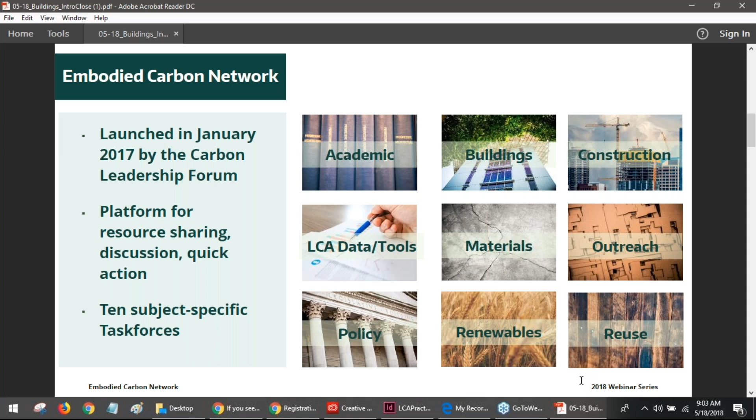The network has 10 subject-specific task forces open to members to join. They can join as one or as many as they would like, and these are spaces for more focused engagement around a specific topic. So the Embodied Carbon Network was convened by the Carbon Leadership Forum. The Carbon Leadership Forum supports and manages the network, and it's an academic collaborative based out of the University of Washington that carries out research, education, and outreach focused on embodied carbon tracking and reduction.

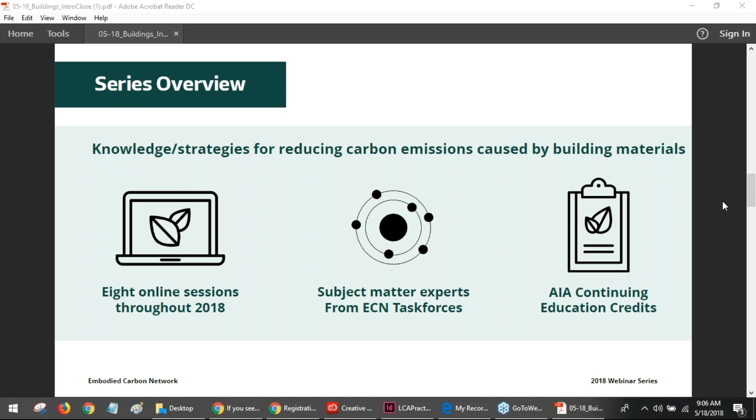So I'm just going to give a brief introduction of what is to come over the next 55 minutes roughly. So we are going to be joined by Kate Simonen, Megan Stringer, Caitlin Gillis, and Graham Twyford Millis. Sorry if I mispronounced any of those names, which I'm sure I did. I'll just give a brief introduction of what each of them will talk about, and then we'll go into the presentations.

So we'll start with Kate kicking us off with an update on the initiatives of the Carbon Leadership Forum, who's been pushing the adoption of LCA in practice, and she'll reflect on some of the insights learned so far through her work, and particularly talk about some connections with the LEED green building system.

Then Megan will share some information on a new document published by the American Society of Civil Engineers. The document's called Whole Building Lifecycle Assessment, Reference Building Structure and Strategies. So it's all about the reference building in the LEED credit. Megan helped develop this document as part of her participation in the Structural Engineering Institute Sustainability Committee.

We'll then move it over to me, and I will give a brief presentation of a document by the Royal Institution of Chartered Surveyors. It's a new document that was released last year, and that's a group based in the UK. I know quite a few of our members and those calling in are based in North America, and they may not be familiar with this document from the UK, but it's a very high quality and useful document, so I wanted to make sure people were aware of that.

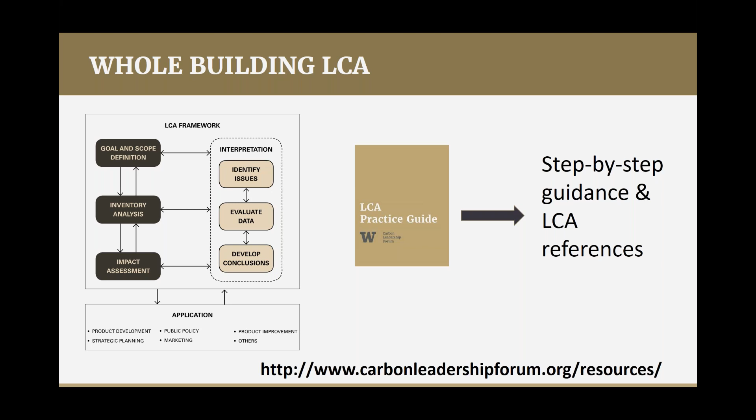Broadly, when conducting a whole building life cycle assessment, there are two numerical efforts. One is to estimate the inventory of materials, and I could say materials and energy in a building. So you're understanding the quantities of steel, glass, electricity consumed, natural gas consumed, and such.

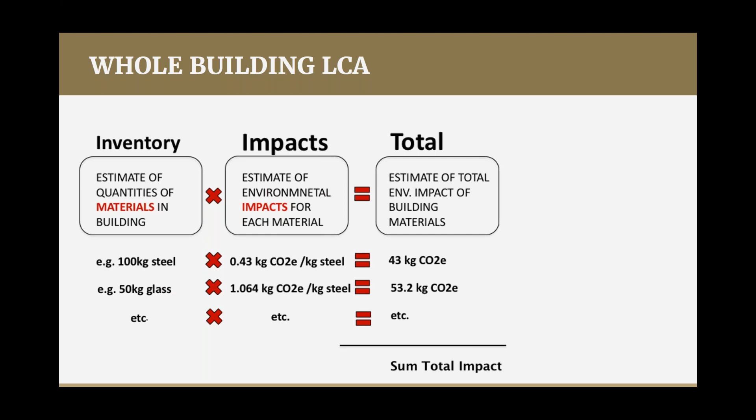So first you need to understand that inventory of materials, and then you need to multiply it by environmental impact, an estimate of the environmental impact for each of these different processes. And then you're summing them up to get the estimate of the total environmental impact of a building. In that process, there are whole building LCA tools that help do both of those steps. They help estimate the inventory of materials and include environmental impact estimates.

So there's one category of LCA data that can be obtained with building industry specific tools. There's also LCA data available if you understood the quantities of materials yourself. So if you had a bill of material quantities, you could multiply by impacts from a range of data sources, some free, some higher quality, some more transparent and easier to use.

So in current North American practice, most architects and engineers are either using whole building LCA tools, Athena or Tally, or they are accessing open source LCA data from either environmental product declarations, the Bath inventory of carbon and energy, which is based in the UK, and the Quartz database of materials, which has both environmental and health impacts. And so which tool to use depends upon whether or not you already have material quantity information and what interface you're looking for to estimate those material quantities in your design workflow.

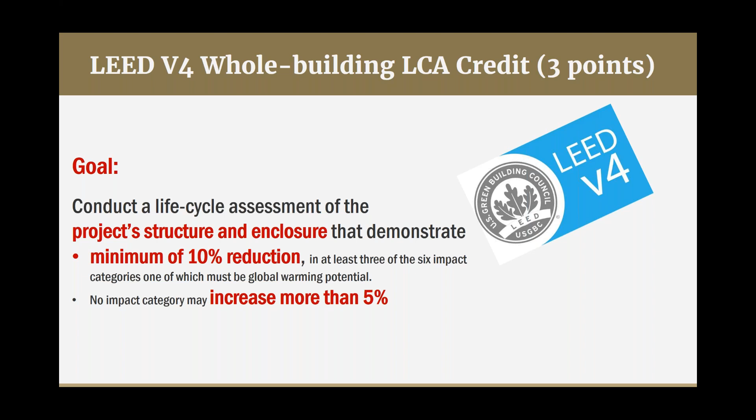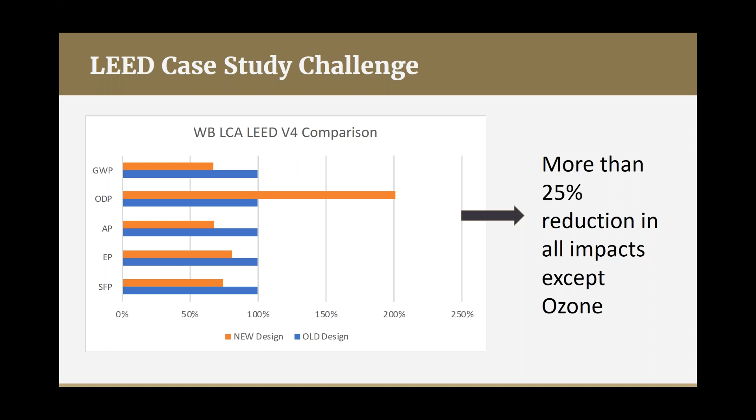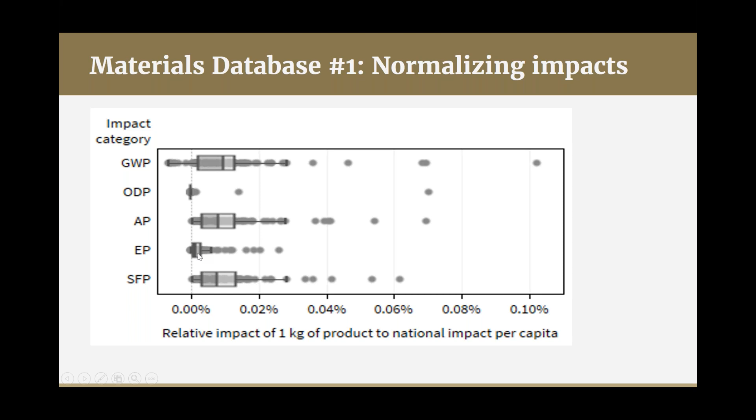Eutrophication potential is also not highly correlated with building material manufacturing because it's mostly related to fertilizers and nutrient flows. So one would expect that eutrophication may show up in some of the timber production in the Southeast where they use fertilizers and some other things, but it is less significant than the impacts that are related to fossil fuel consumption.

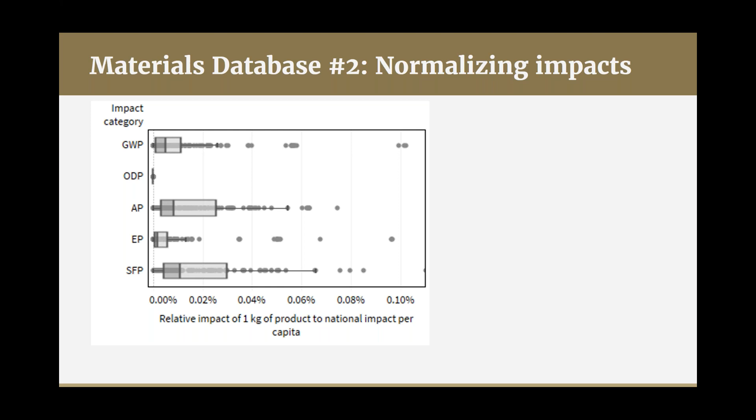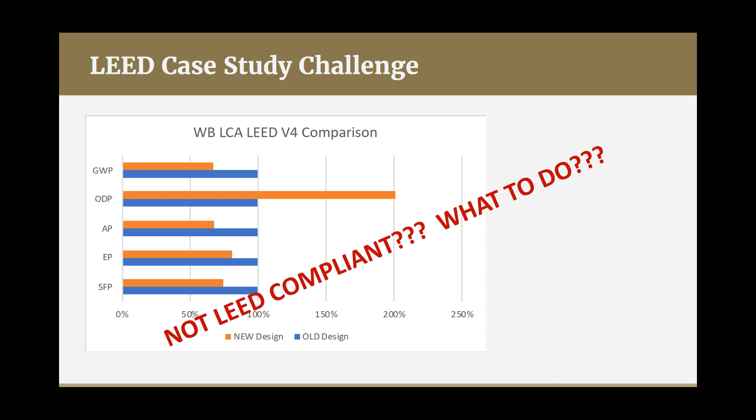So looking at this whole building life cycle assessment, it shows that it's not LEED compliant. What should you do? Should you not make this change, which has a fairly significant reduction in many impacts, because it has a high increase in another? We're putting together an argument that in the next iteration of LEED we should not include ozone depletion in this criteria, because if you normalize the whole building results, again, you can see that the relative impact of ozone is very small. And so my recommendation would be that you don't use ozone depletion as a criteria to select building materials or in whole building life cycle assessment. But at the current time, that's not the case. So right now, you would not meet the LEED credit if your building had this occur.

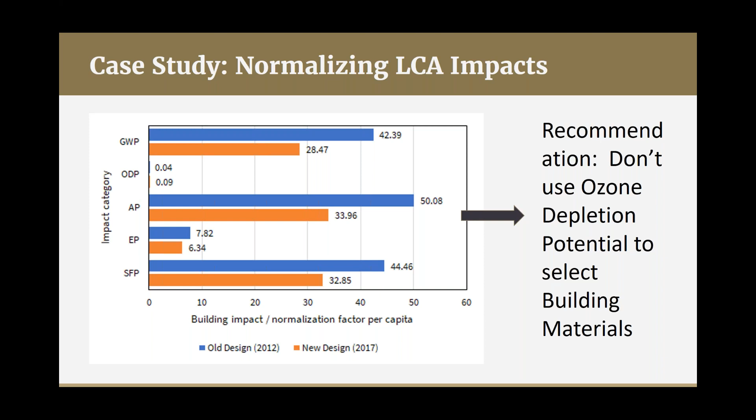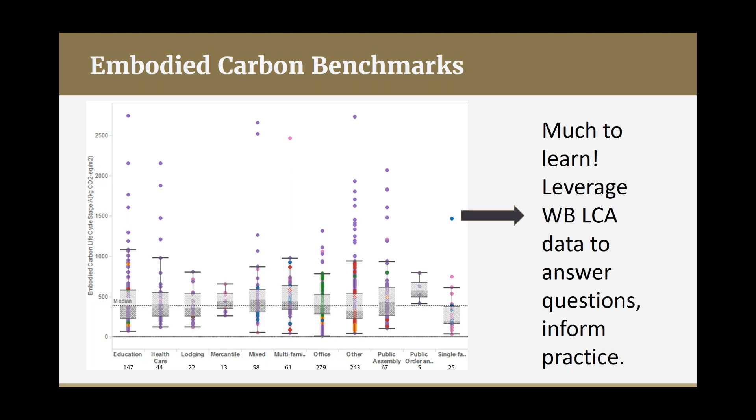So in conclusion, I just want to highlight that whole building LCA is a learning process at this stage. And that although we are learning how to do it well, and we're learning how to compare and have benchmarks, I would encourage all people to approach the use of whole building life cycle assessment as an opportunity for you to ask questions and inform your practice, and also encourage you to share your data publicly so we can help advance the practice.

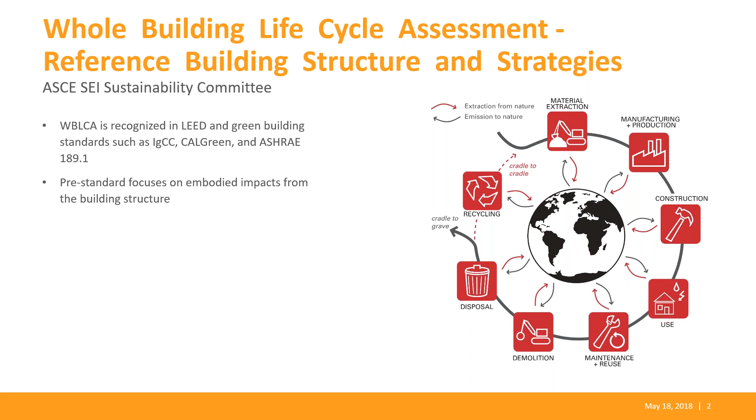So talking about the guide itself, it is structured into two different parts. The first part sets out fundamental concepts to support a defensible reference building and includes definitions, reference building options, and general considerations to keep in mind when defining the reference building.

Within these strategies, there is guidance on how to employ the specific strategies, examples are provided, any issues that you should be aware of are explained, and then if there are any material-specific considerations, they are discussed. So this section is definitely going to be a great resource, even if you're not performing an LCA on your building, or even if your project doesn't have sustainability goals. They're just great strategies that can be employed to design any building to have less environmental impacts.

So this guide does aim to encourage structural engineers to take a more active and meaningful role in the practice of green building and life cycle assessment. And while the authors of the guide are structural engineers writing primarily for structural engineers, other building professionals will find value in the document.

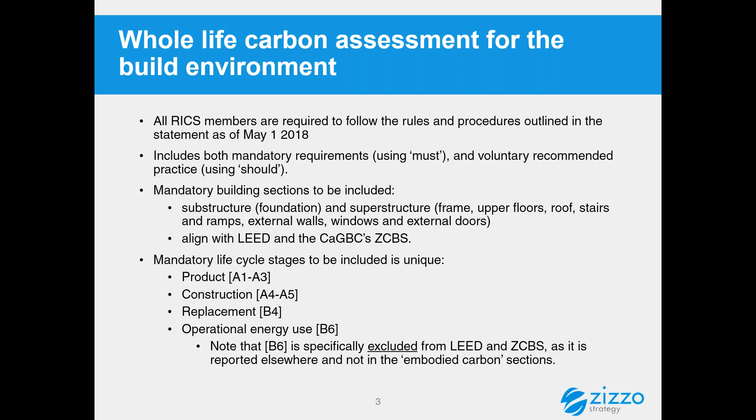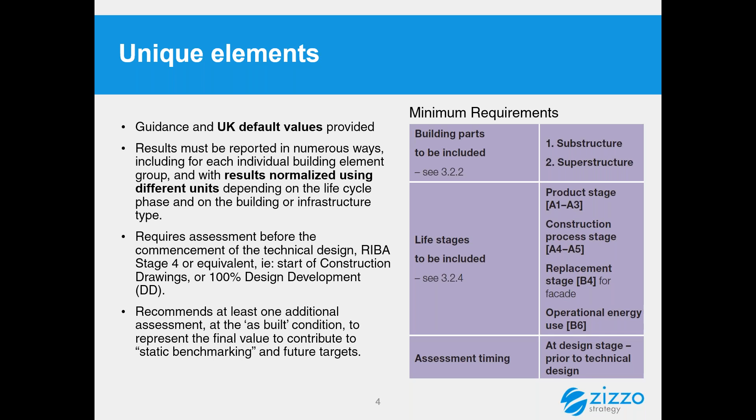So there's some things in the document that are quite useful. As I said, these purple boxes are really easy to read. They pop off the page, and it provides a base set of minimum requirements for the things that should be included. Also, something that I really liked in this document was that they say when the assessment should take place. So there's a requirement for it to take place at the end of the detailed design or design development, and then they also recommend an additional one at the end of the project at substantial completion. So we have a more final value to use. So one model to help inform the design, and then one to have a final value for what the project actually ended up being. So there's some unique insight like that.

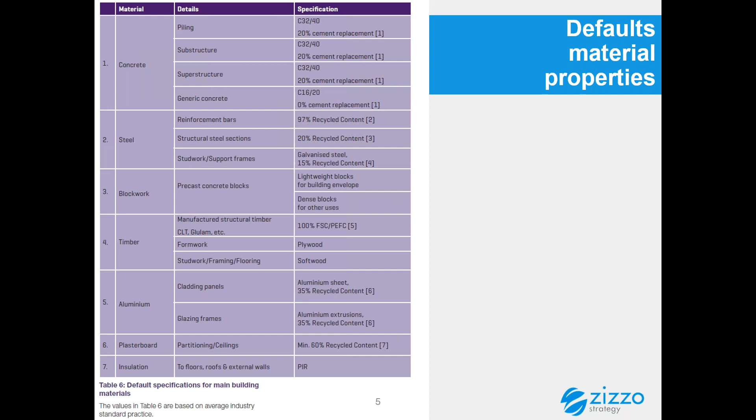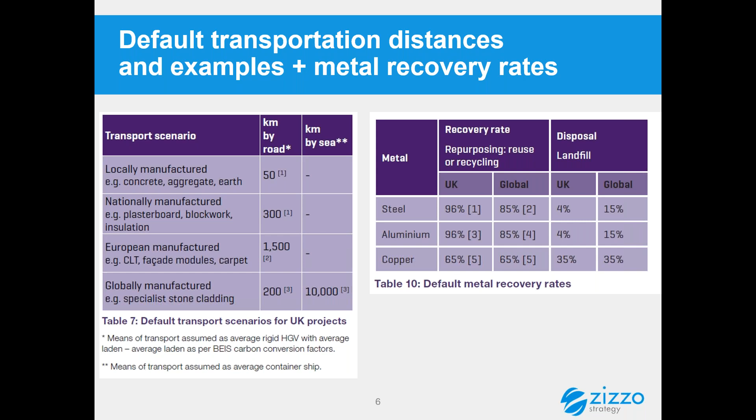Some other default information that is useful here, we can see we have default transportation distances by material, which is quite interesting. So you can see here on the first table 7 there, it says things like concrete, aggregate, and earth would be locally manufactured or locally mined, and they give a default distance in kilometers for that. And then if you go up to things like CLT, facade materials, carpets, that would be more on the large scale regional, so in this case European scale, and they provide a default transportation distance. So again, some useful information. Similarly, there's default values that they provide for recovery rates, recycle rates for different materials.

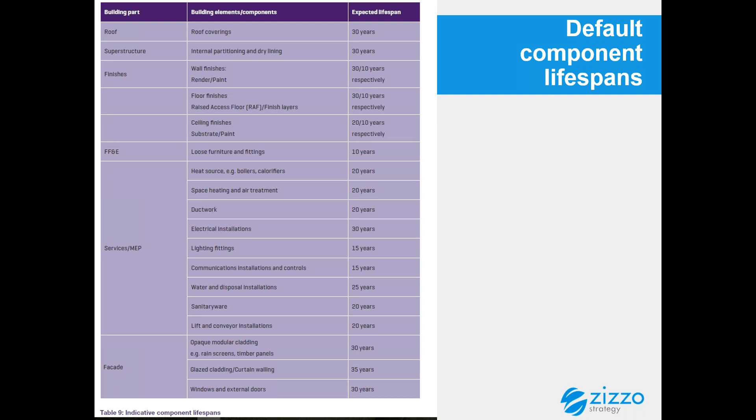And another list of useful defaults that, if people are doing this type of analysis, would be a good point of reference is the expected lifespan for various different materials or systems in buildings. So we can see a default of 30 years for roofing coverings, or a default service life of 20 years for sanitary ware, or various other defaults here, which again would vary from place to place, but it's very useful to have a reference point that we can start working from.

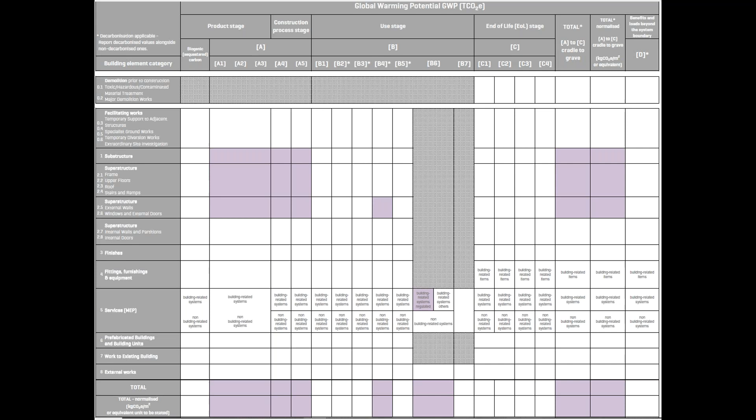So again, that was just a really quick overview. I wanted to bring that to everyone's attention. As I said, it won't be 100% applicable in all markets, but I think it's a really useful point of contact, and there's a lot of other really great information in that document. So I just wanted to bring it to everyone's attention.

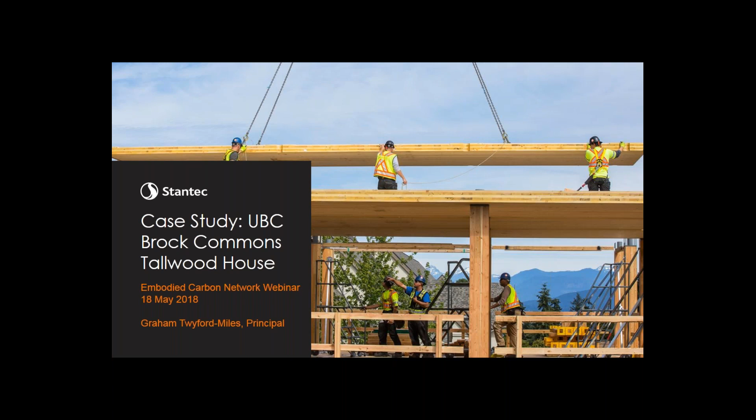So I'm going to try and pull a number of the concepts we've been talking about this morning together through the lens of a specific project and a case study on that project with respect to performance around materials specifically, and that's the UBC Brock Commons Tallwood House. A little bit about the project. I want to talk a bit about the UBC policy framework and the context within which this project came from. It's a really unique project. And then a little bit about the performance, and then future directions in terms of where we see this precedent taking us.

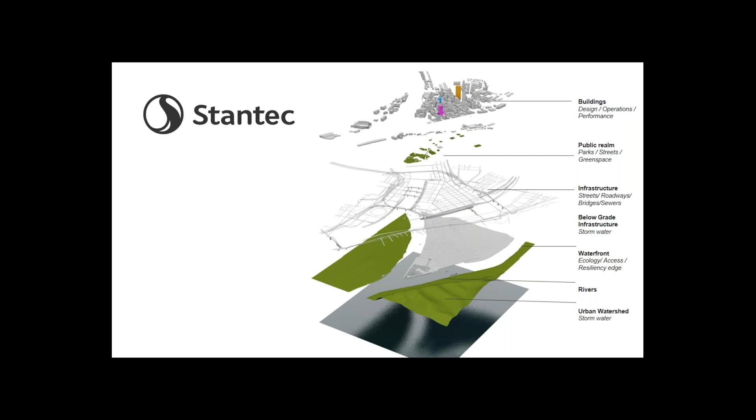We've introduced me, and the only thing I wanted to say here was just a little bit about Stantec. We're a Canadian-based global design firm. We operate at every scale of the built environment, and I lead our sustainability building performance team on the Canadian side of the border, which supports better performance outcomes for projects across the built environment through the lens of performance modeling and rating systems and other evaluation tools.

The UBC context for this project is important because it's a bit of a unicorn project. This wouldn't have happened without a significant degree of leadership from UBC as an institution and a number of specific individuals at the university. They're a world leader in sustainability.

They've very successfully embedded sustainable development principles across their operations, and they've done that through the concept of the living laboratory, where they incorporate research, operational, and academic efforts to leverage specific projects and specific experiences on the campus into scalable, replicable and testable actual projects that can be evaluated and applied to the broader community. And this is a great example of what one of those looks like.

The living lab philosophies had a significant impact on the built environment, in particular at UBC. They've done about $1 billion worth of development in the last 10 years, and much of that has been at the front end of building and infrastructure performance. And I think what's important to recognize about Brock Commons is

innovation at the scale we've seen on this project is a relatively rare thing in construction. The industry is painfully risk averse, and it's very slow to evolve, especially for those of us in the green building world. And we really don't see big moves like this. There's a real sluggishness in the industry around innovation with respect to performance. It takes a long time, as I'm sure folks on the line know.

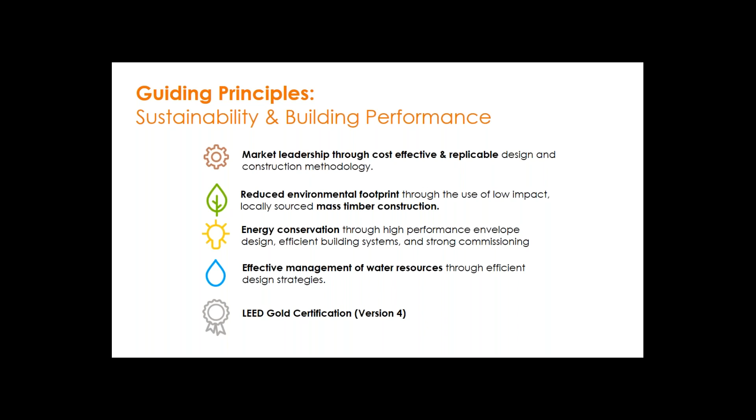So what does the project actually look like? The project team, I should note, the architect was Acton Ostry. It's a local Vancouver-based architect, and the structural engineers were Fast and Epp. So the heavy lifting was really done by those two firms. Stantec and my firm were responsible for the mechanical, fire protection scope, the electrical engineering scope, and the sustainability work. And sustainability in this context was LEED certification, facilitation, and compliance and the strategy around that, and then LCA analysis through the lens of LEED version 4 to evaluate the performance of the building from an overall life cycle perspective.

UBC is at the very western end of the peninsula within Metro Vancouver, and is separated from the city by a very large park. There's about 400 acres, a daytime population of 70,000 staff, students, faculty, and 15,000 students living in residence. There's a number of challenges locally because of the geography and the real estate prices in this city. There's a major unmet demand for student housing on campus. And so the champion and the client for this project was the Student Housing Department at UBC. They are the largest student landlord in Canada.

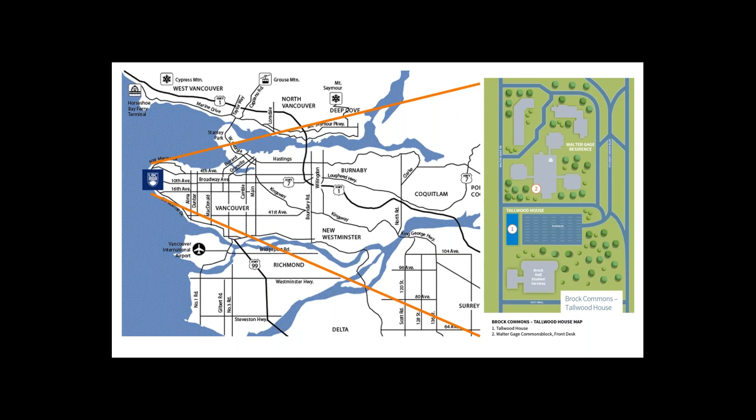They've developed about 3,000 beds in the last 6 or 7 years, and Brock Commons was an addition to that mix, and it's the first building in a new complex in the center of campus that will ultimately hold between 1,200 and 1,500 students. The building is on a very small site. It sits wedged between a parking garage and two other buildings. 18 stories, 400 and change in terms of units. They're primarily studio and 4-bedroom apartments. It was completed last September in time for the school year and had a budget of about $50 million.

And fundamentally, the unique element of the project is it is a mass timber hybrid building. And when it was completed last year, it was the tallest mass timber hybrid building in the world. It will maintain that title for, I think, about another 6 months. There's another mixed-use residential project in Vienna that is hot on the heels of the UBC project, and will take that title shortly.

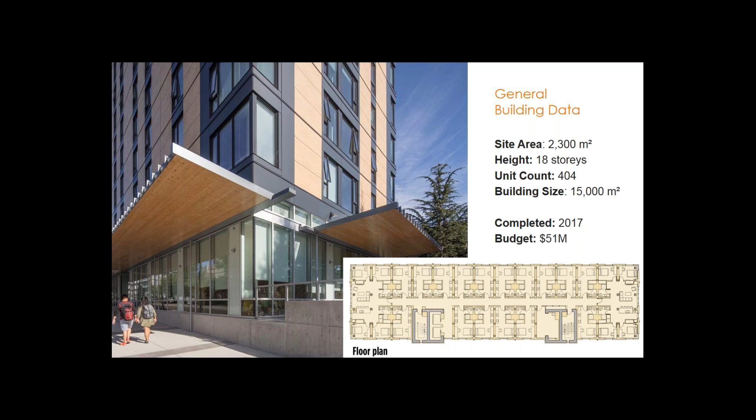Study and social space on the ground floor with student lounge space on the top floor with some of the cheapest and nicest views in Vancouver. So the design. The foundation, the first floor, and the second floor slab, along with the stair and elevator core, are all cast-in-place concrete. And the wood material is used as the structure. So there's no steel in the building of significance. And the wood material was sourced locally from British Columbia and manufactured by Structurlam in Penticton.

The mass timber construction was really only possible because of a site-specific building code regulation that was granted by the province of BC and facilitated by the university that established requirements for the project to meet or exceed the performance of a comparable non-combustible building. So, long story short, this particular project was only possible in this particular site because of what was effectively a site-specific exemption from the typical building code requirements, which is why the superstructure was allowed to be prefab, cross-laminated timber floor assemblies, and glulam timber columns with some steel connections.

The envelope was prefabricated steel stud frame panels with wood laminate cladding. On top of the wood structure was 3 to 4 layers, depending on the floor and the area, of gypsum board. And that had a fire protection function. They were very conservative, as you can imagine, in fire protection, seismic requirements, and acoustical considerations in order to ensure that those issues were addressed and could be studied over time.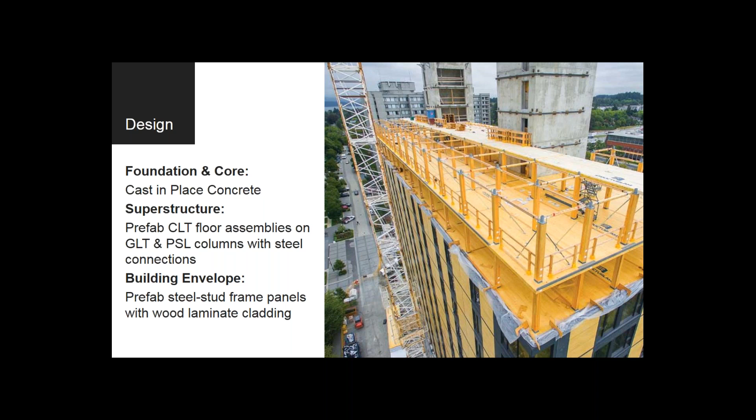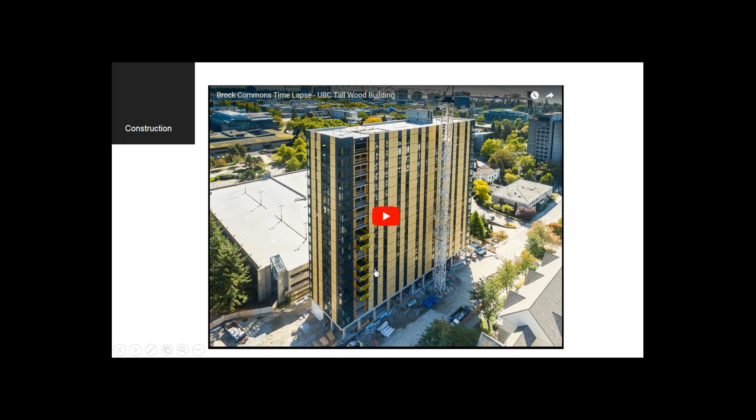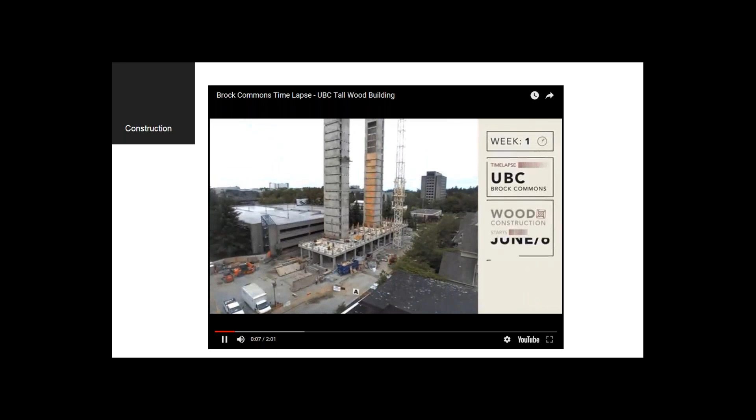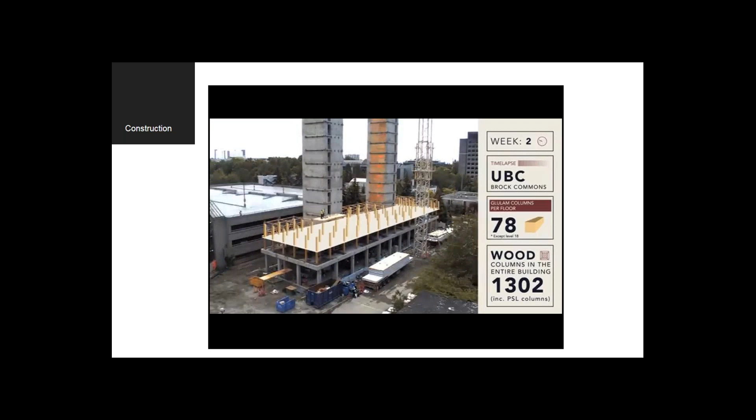So how does the building actually perform? I'm going to show you a short time-lapse video of the construction process. One of the significant elements of this project was the speed with which it went up. The structure and the envelope were completed about 2 floors per week. And the project overall was completed with 2 months left over in the schedule. So the prefabrication and the just-in-time delivery resulted in huge benefits to the construction process, and a number of other downstream advantages.

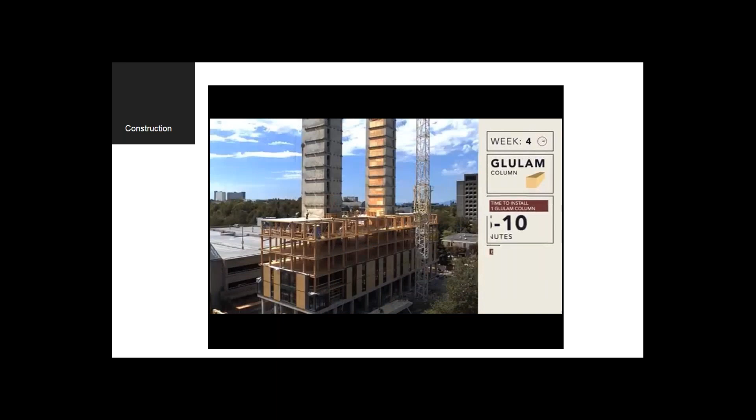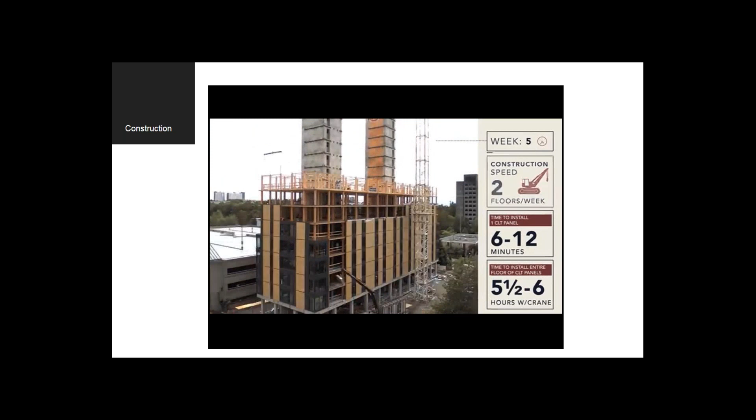There was a 50 to 60% reduction in construction waste relative to other similar projects at UBC. And those were LEED projects that were tracking their construction waste and had a significant diversion rate. So that's a reduction from already high performing and high diversion rate projects. Significant reduction in vehicle traffic on site from construction and deliveries and waste management. And a significant reduction in manpower on site.

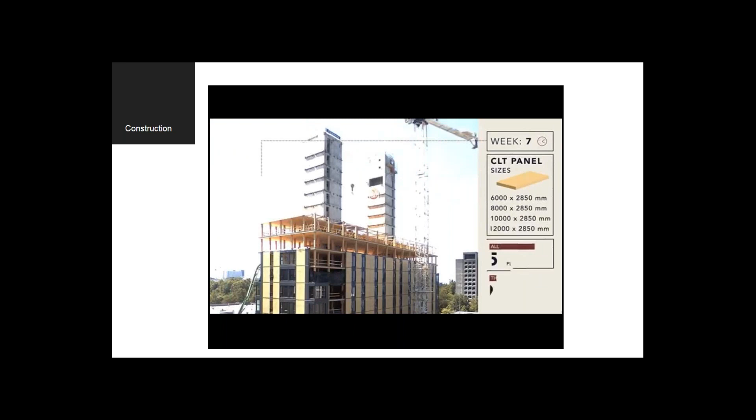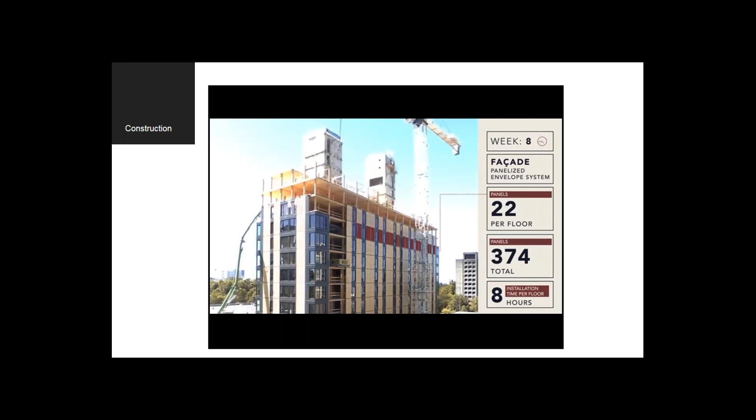There were only 9 or 10 trades on site during the construction process, which significantly, again, reduced construction traffic, reduced noise, and dramatically reduced the potential for accidents on site. So from a feasibility and constructability perspective, the outcome was really positive for the university and for the builder.

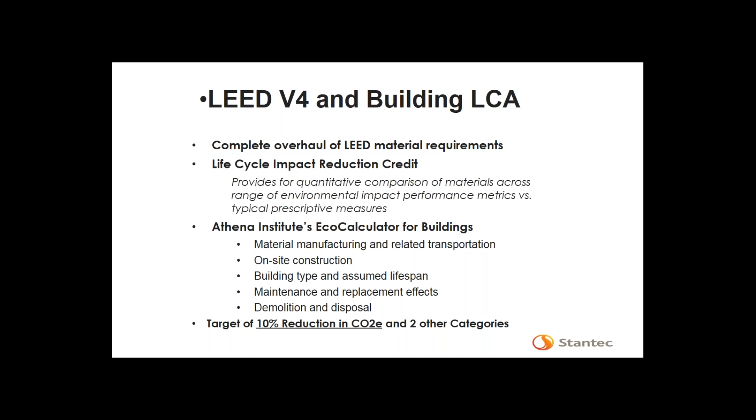Other speakers have already spoken quite a bit about the V4 framework and life cycle analysis within it, so I'm just going to skip through that and talk about the actual comparison and the analysis of the construction assemblies. So the analysis was based on the proposed building and a baseline, and the baseline took the form of a very similar residence tower that was completed the year before. That was one that Stantec was also involved in, and it was based on the issued for construction drawings and a bill of materials.

And this analysis, to be clear, was completed at the end of construction. So this wasn't a guidance or decision-making tool. This was a retroactive analysis to assess and understand the implications of, again, that big move toward mass timber construction in lieu of concrete and steel. We used the Athena Impact tool, consistent with V4.

And as you can see in this table, the foundations were relatively similar, but there are significant differences in the walls, the columns, and the floors. So we had timber columns relative to reinforced concrete in the baseline building, and we had cross-laminated timber flooring relative to reinforced concrete in the baseline building. And the envelope was prefab, steel framed with wood panels versus concrete sandwich panels.

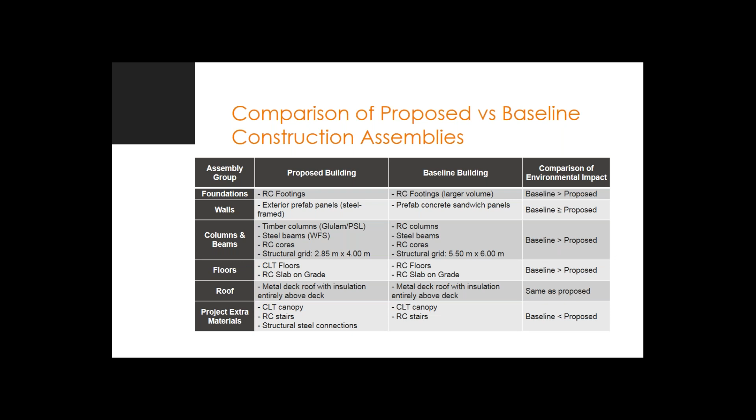So the impact across all of the Athena categories was significant. We were 24, 25% in each one. So not only did we meet the minimum threshold, but we qualified for an additional 2 points and an exemplary performance point. So the overall contribution of the LCA analysis to the LEED strategy and the LEED scorecard was relatively significant.

For the baseline building, the reinforced concrete floors contributed the highest to the embodied carbon, followed by the walls, and then by the concrete foundation. For the proposed building, the floors were the leading reason for the reduced global warming potential.

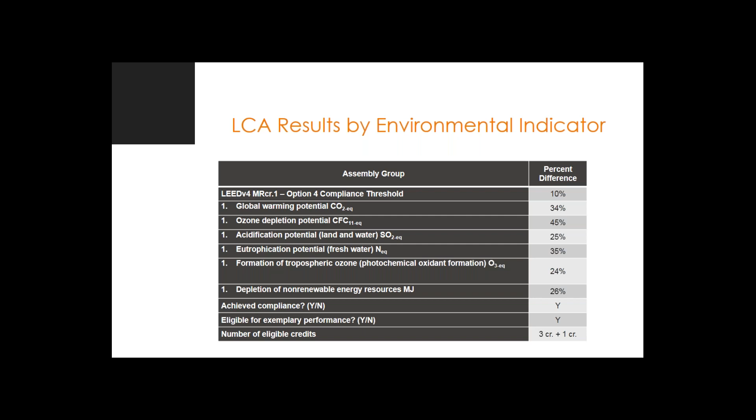The energy performance target of 120 kilowatt hours per meter squared per year. We're still doing the post-occupancy assessment. The building hasn't been open for a year, but it does appear to be in line with that target, which is not terribly aggressive, but it's a relatively well-performing building. The mechanical systems and electrical systems in the building were fairly straightforward. The innovation in this project was really in the structural and the material selection.

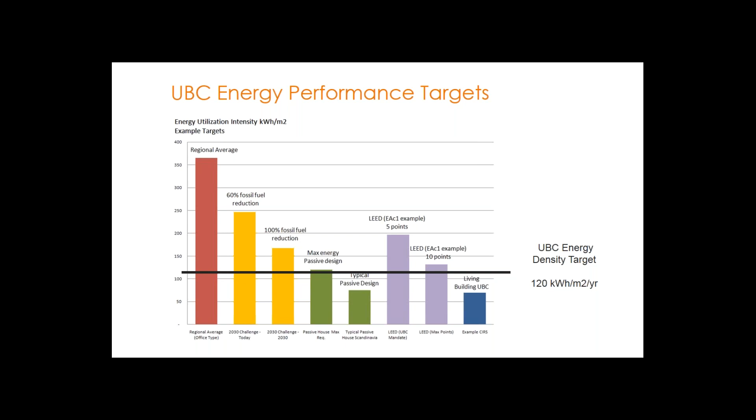So where's this taking us? And what can we expect to see in the future with respect to mass timber? I think what's most interesting about this project is the rediscovery of much of what we used to know and used to practice historically with respect to wood and mass timber construction, and how elegantly simple the project actually was. When you drill down and look at the schedule and the assembly and the outcomes, this was a very straightforward project, and has had positive outcomes for virtually every stakeholder.

And fundamentally, in North America, wood's almost always a local material. It absorbs and sequesters carbon, and if we can find a means of replacing steel and concrete in future projects, the potential benefit is tremendous. You combine that with a prefabricated construction model that reduces site waste, transportation impacts, and accelerates the schedule. That translates into a very cost-effective construction scenario, which really is the driver for change in this industry.

There was a 7% premium on this project over business as usual, what they called the innovation premium. But it appears, based on the analysis, that premium was largely related to upfront first-time costs and would be largely eliminated in subsequent work. So we have and do see this as a commercially viable project and one that is replicable for future applications, providing the building code continues to evolve in a way that allows more substantial use of wood over time.

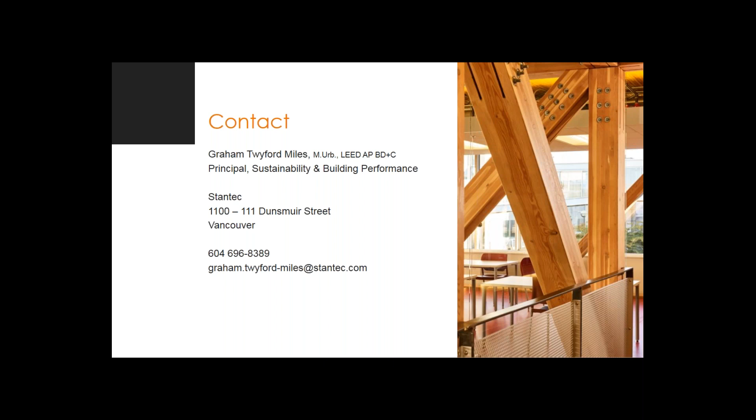Thanks, Tina. So I can't see the screen for some reason, so I'll just ask you to switch the slides if that's okay. Okay, sure. Okay, great. Thank you very much. Apologies for the technical difficulties on my side. Don't really know what's going on, but we'll go with it.

So I'm going to give a high-level review of the CAGBC's zero carbon building standard. Next slide. So the zero carbon building standard is really the first standard from Canada to really focus on carbon emissions. And it looks at this both through operations and embodied carbon. It was officially released in May 2017, but there are 16 projects that signed up for the pilot phase, which started in January of 2017. And I'll show you some of the pilot projects later on in this presentation.

Next slide. So what they really wanted to do is to focus on carbon as one way to meet the COP21 targets. And instead of just looking at energy performance, it really considers the carbon intensity of the grid as well. Next slide, please. So the standard is applicable for all new and existing building types except Part 9. So in Canada, that's low-rise residential buildings. And there are two certification pathways. So design, that's once the design is completed, of course, and then performance. So these are for buildings that have been operational for at least 3 years or 12 months post-occupancy for design certified buildings. And design certified buildings are expected to go for performance certification as well.

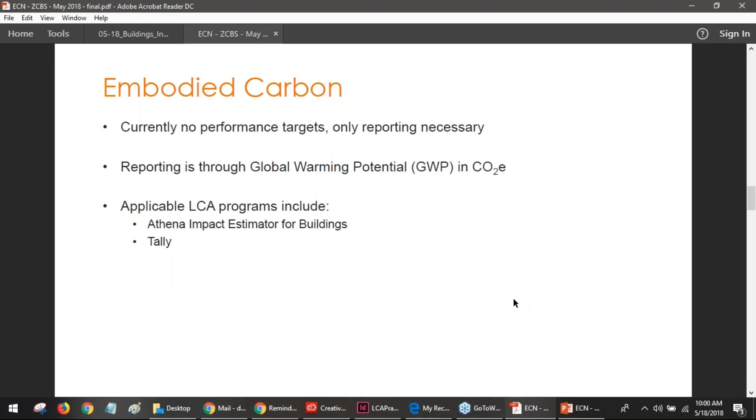Next slide, please. So for the pilot projects, as I mentioned earlier, there are 16 that registered for the pilot phase. It was really great because they spanned across Canada, all the way from Nova Scotia on the Atlantic side of the country to British Columbia on the Pacific side. And they included new and existing buildings. So in total, there are projects in 6 provinces.

So I wanted to briefly touch upon similar systems globally, what other green building councils globally are doing. The World Green Building Council has a project called Advancing Net Zero. There are currently 15 green building councils around the world that are part of this project. Of those 15, 5 so far have created zero carbon building standards. And 3 of them, the French, Canadian, and the Australian, have somewhat included embodied carbon. The other 2, from Brazil and South Africa, plan on incorporating embodied carbon in future iterations.

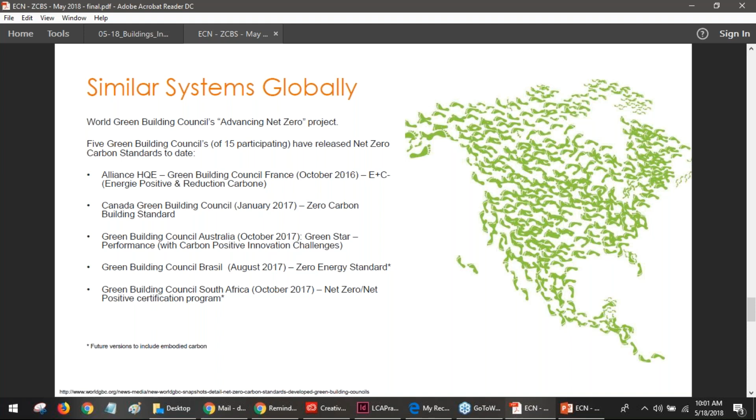Other green building councils globally may be doing other things as well with regards to embodied carbon; for example, the UK Green Building Council has released a practical guidance report on this topic. I know that these slides will be circulated, so I just wanted to have some resources up if anyone's interested in learning more about the CAGBC standard or the World Green Building Council's project. Thank you.